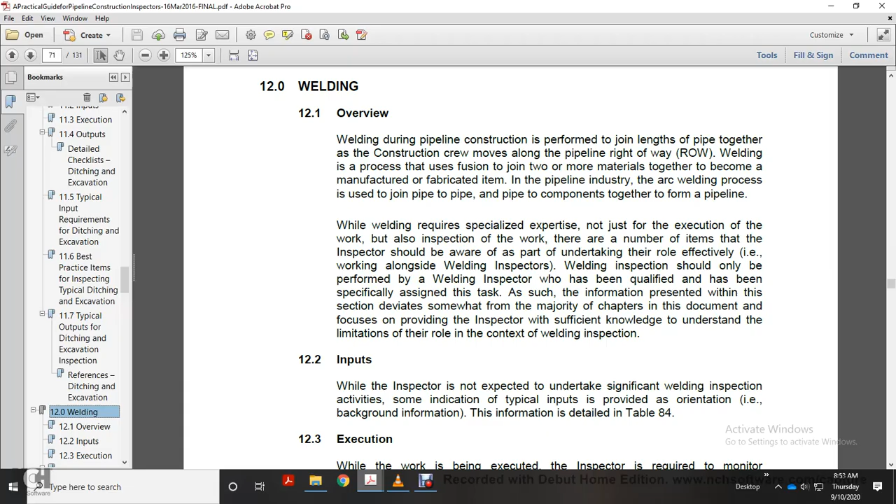Alright, Chapter 12, Welding. Chapter 12, Welding. Practical Guide for Pipeline Construction Inspectors, CEPA Foundation, INGAA Foundation, Incorporated, published March 2016.

Alright, Welding Overview. Hold on, let me just get situated here. Alright, overview. Welding during pipeline construction is performed to join lengths of pipe together as the construction crew moves along with the pipeline. Welding is a process using fusion to join two or more materials together to become a manufactured or fabricated item. In the pipeline industry, the arc welding process is used to join pipe to pipe, and pipe to components to form a pipeline. Welding requires specialized expertise not just for the execution of the work but also inspection of the work.

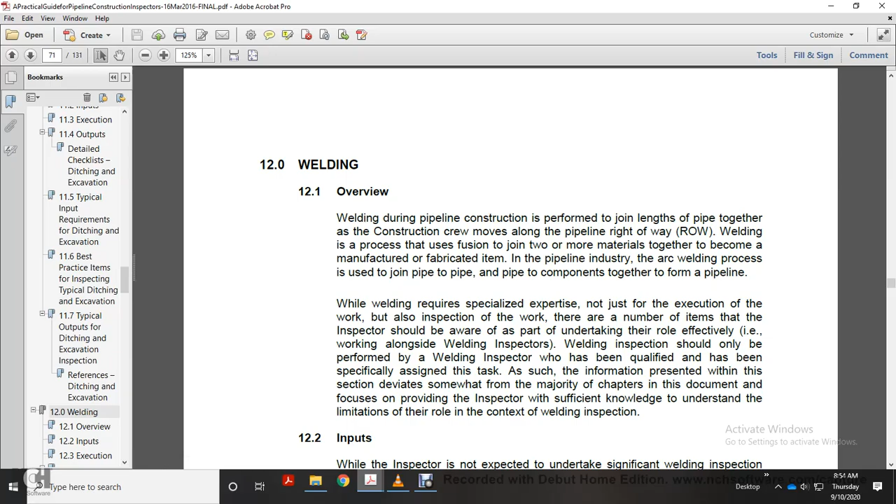There are a number of items that inspectors should be aware of as part of undertaking the role effectively. Working alongside welding inspectors: welding inspections should only be performed by the welding inspector who has been qualified and has been specifically assigned the task. As such, information presented within this section deviates somewhat from the majority of the chapters in this document, focusing on providing the inspector with sufficient knowledge to understand the limitations of their role in the context of welding inspection.

12.2 Inputs. While the inspector is not expected to undertake significant welding inspection activities, some indication of the typical inputs are provided as orientation and background information. The information is detailed in Table 84. 12.3 Execution. While the work is being executed, the inspector is required to monitor the workmanship and report on the progress on a periodic basis.

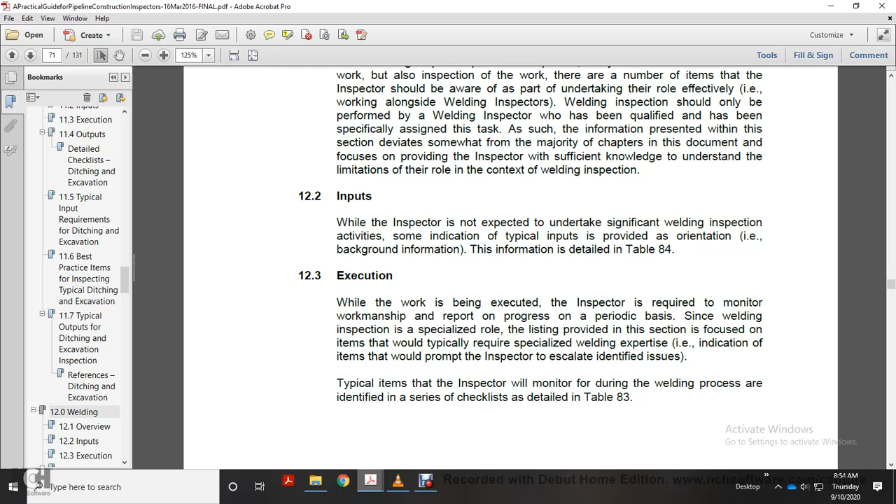Since welding inspection is a specialized role, the listing provided in this section is focused on the items that would typically require more specialized welding expertise. items that would prompt the inspector to escalate identified issues. Typical items the inspector will monitor during the welding process are identified in the series of checklists, Table 83. Alright, Table 83, Monitoring Requirements of Welding. Prior to commencing on a daily basis, ensure that the key issues have been identified, detailed and addressed.

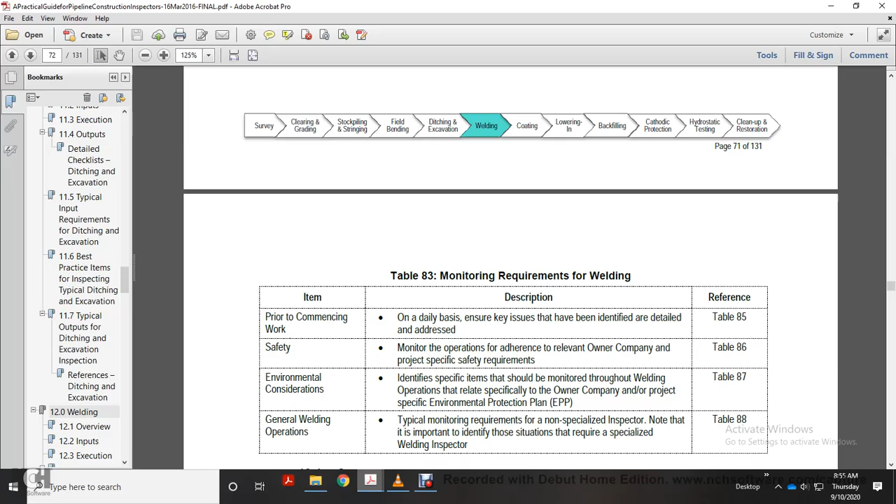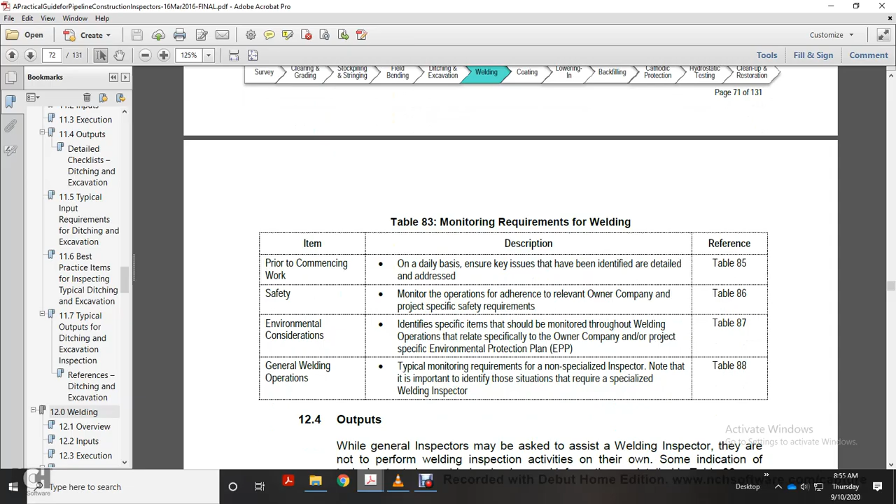Safety. Monitor the operation's adherence to relevant owner company and project-specific safety requirements. Environmental considerations. Identify specific items that should be monitored with a welding operation that relate to the owner company or the project-specific environmental protection plan. General welding operation. Typical monitoring requirements of a non-specialized inspector. Note the importance of identifying situations that require specialized welding inspection.

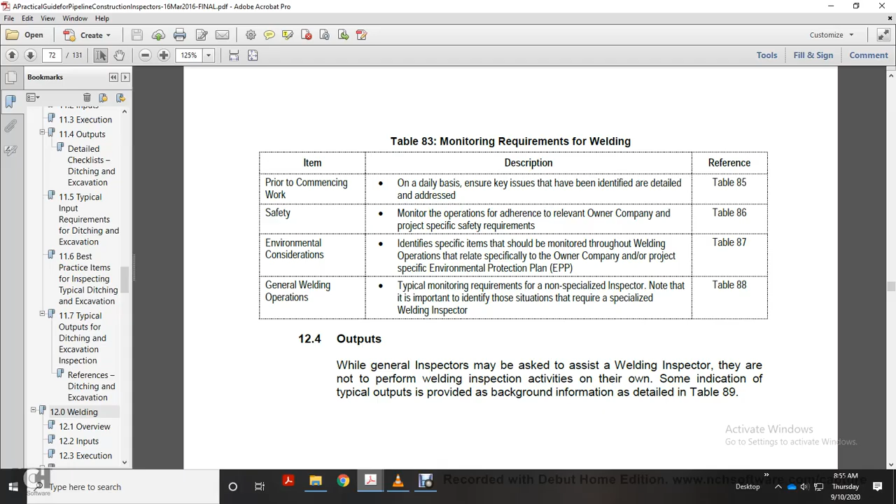12.4. While the general inspector may be expected to assist the welding inspector, they are not performing welding inspection activities on their own. Some indication of the typical outputs are provided as background information detailed in Table 89. 12.5. Typical input requirements of welding inspection. Table 84. Information requirements of the welding inspection.

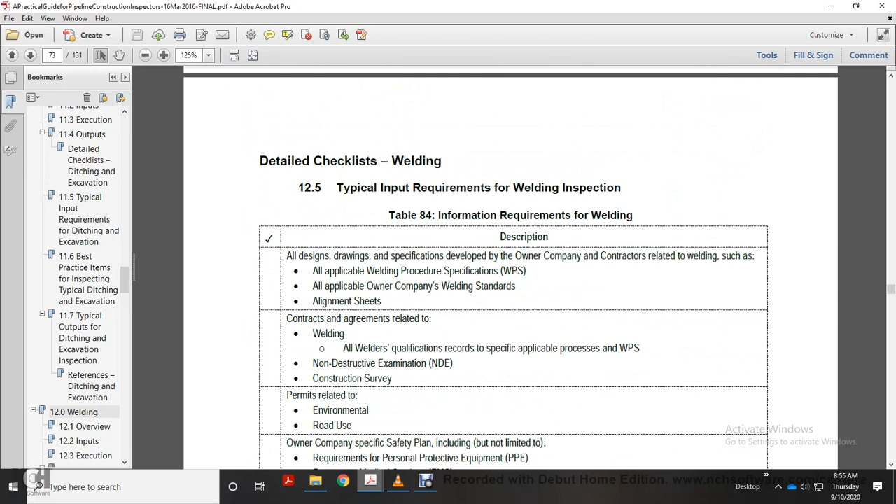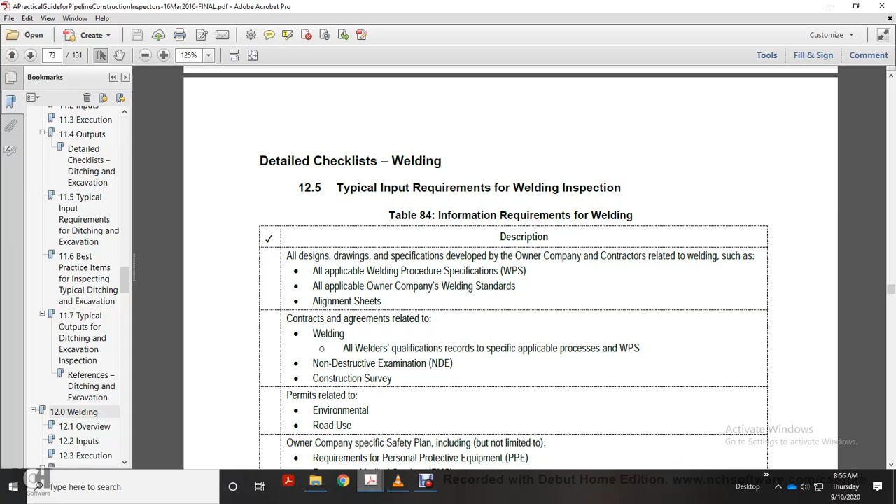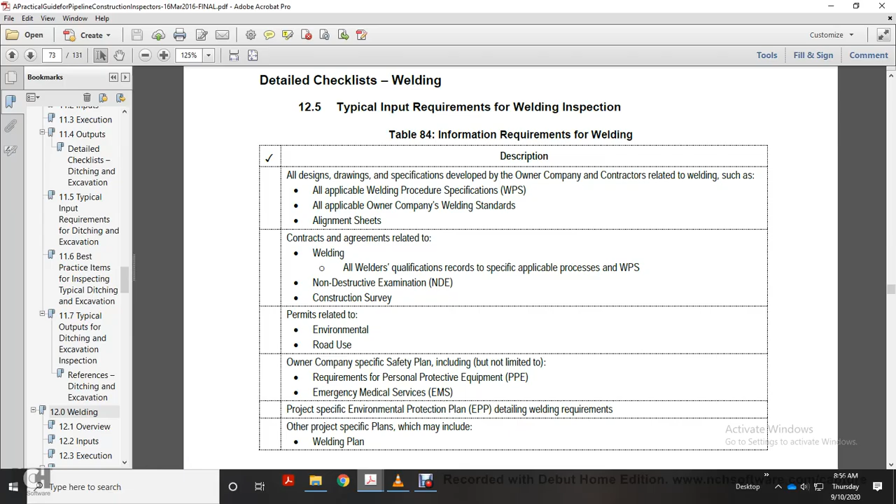All drawings and detailed specifications from the owner company and the contractor related to the welding, such as all applicable welding procedure specifications, or WPSs. All applicable owner company welding standards, alignment sheets, contract agreements related to the welding, all welder qualification records for the specific applicable process, welding procedure specifications, non-destructive examination, construction survey, permits related to environmental and road use, owner company safety plan, including but not limited to the requirements for personal protective equipment, emergency medical services, project-specific environmental protection plan, detailed welding requirements, and other project-specific plans which may include a welding plan.

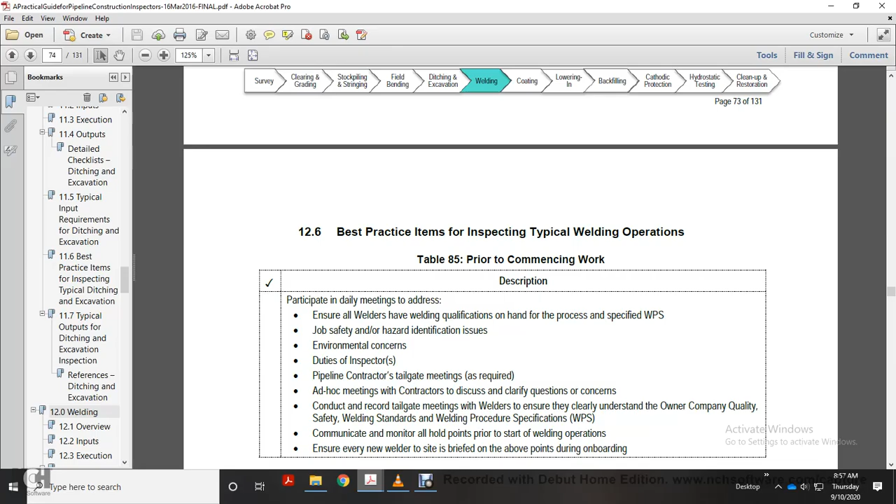Alright, Table 85. Prior to commencing work, participate in daily meetings to address and ensure all welders' welding qualifications are on hand and processes are welded per the welding procedure spec. Job safety and hazard identification issues, environmental concerns, duties of an inspector, pipeline contractor tailgate meetings as required, ad hoc meetings with the contractors to discuss and clarify questions and concerns. Conduct and record tailgate meetings with the welders to ensure that they clearly understand owner company quality, safety, welding standards, welding procedure specifications, communication, and monitoring of all points prior to starting the welding operation. Ensure every new welder to the site is briefed on the above points during onboarding.

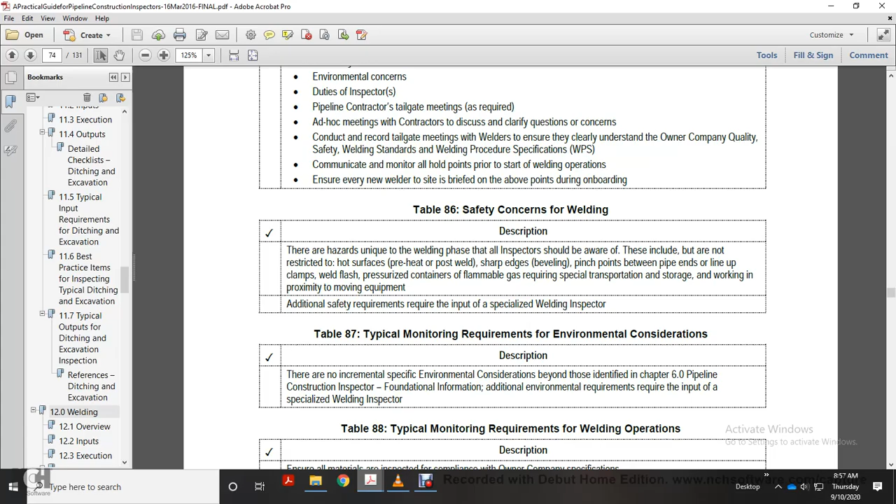Table 86, Safety concerns of welding. There are hazards unique to the welding phase that all inspectors should be aware of. They include, but are not limited to, hot surfaces from preheating and post-welding, sharp edges from beveling, pinch points between pipe ends and line-up clamps, welding flash, pressurized containers and flammable gas requiring special transportation and storage, and working in proximity to moving equipment. Additional safety requirements require the input of a specialized welding inspector.

Table 87, the typical monitoring requirements of environmental considerations: no incremental specific environmental considerations beyond what is identified in Chapter 6.0, Pipeline Construction Inspector Foundational Information. Additional environmental requirements require the input of the specialized welding inspector. Table 88, typical monitoring requirements of welding operations.

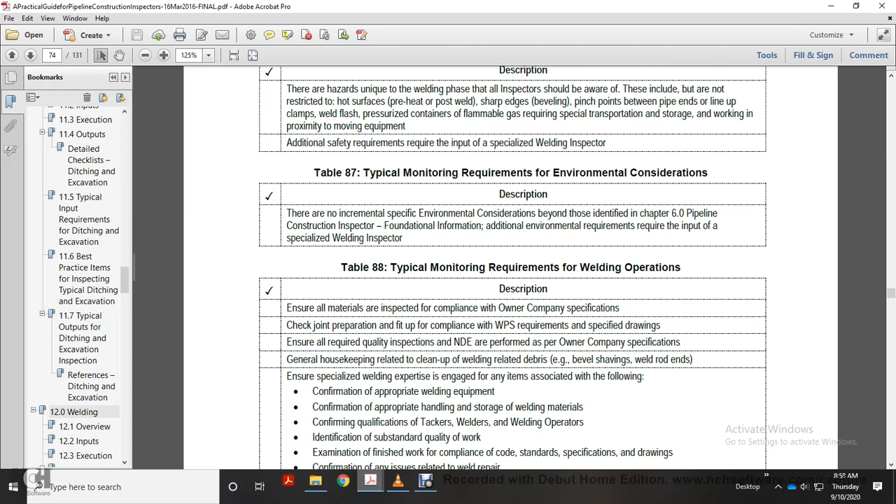Ensure all materials are inspected and compliant with the owner company specification. Check joint preparation and fit-up for compliance with welding procedure specification requirements and specified drawings. Ensure all required quality inspection and non-destructive examination are performed per owner company specification. General housekeeping related to cleanup of welding-related debris, bevel shavings, and welding rod ends.

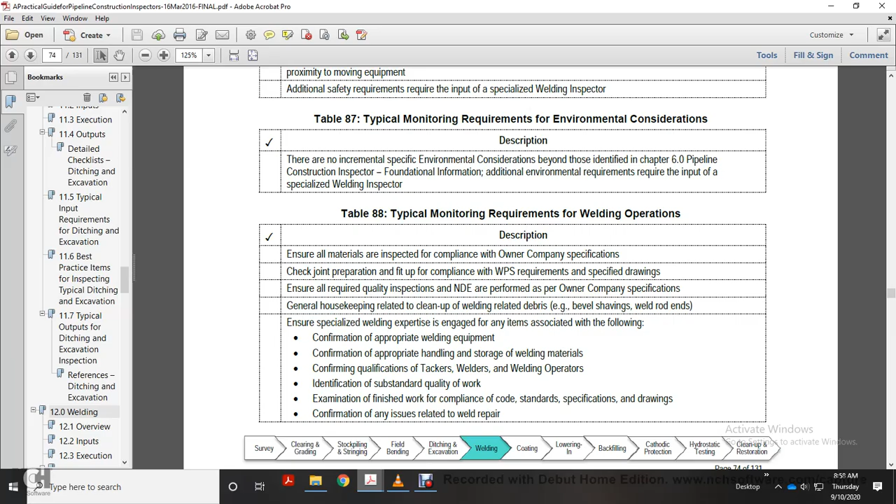Ensure a specialized welding expert is engaged in any items associated with the following: confirming appropriate welding equipment, confirming the appropriate handling and storage of welding materials, confirming qualification of tackers, welders, and welding operators, identification of substandard quality of work, examination of the finish for compliance with codes, standards, specifications or drawings, and confirmation of any issue related to weld repair.

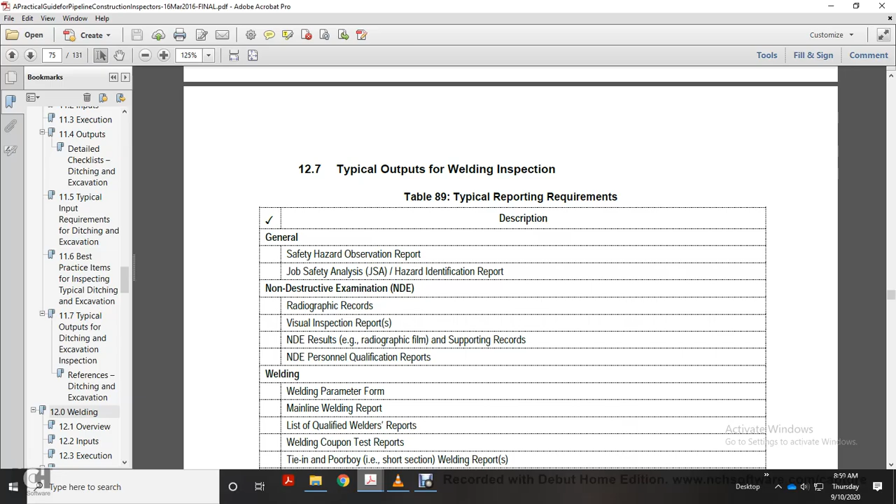Table 89, typical reporting requirements. General safety hazard observation report, job safety analysis, hazard identification report, non-destructive examination radiographic reports, visual inspection report, non-destructive examination results and supporting records, non-destructive examination personnel qualification reports, welding parameter form, main line welding report, list of qualified welder reports.

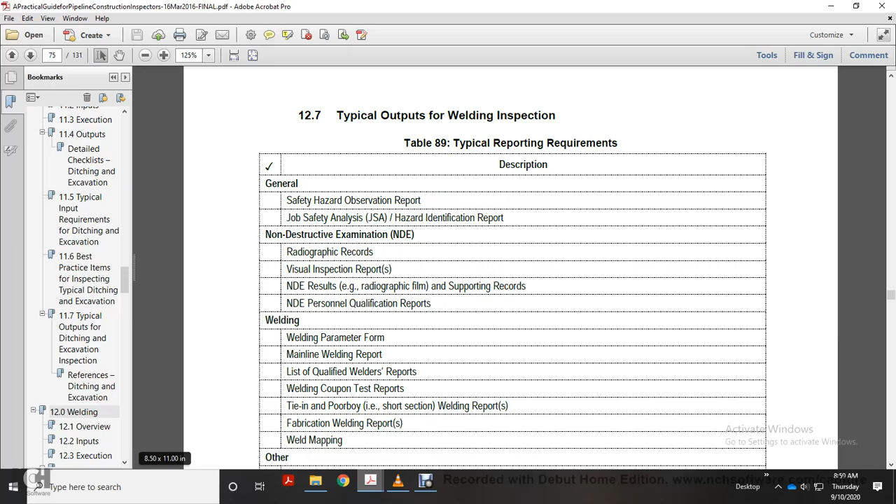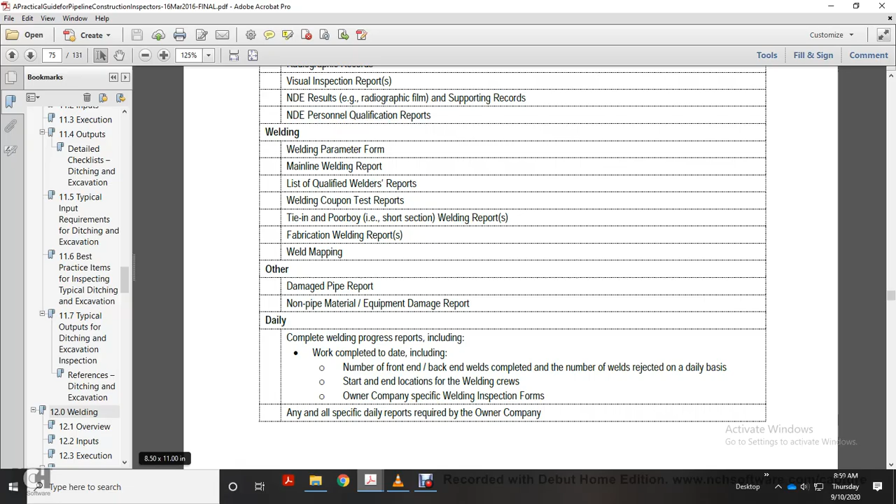Welding coupon test reports, tie-in and poor boy welding reports, fabrication welding reports, welding map, damaged pipe report, non-pipe material and equipment damage report, complete welding progress reports, including work completed to date, including number of front end and back end welds completed, and number of welds rejected on a daily basis, start and end locations, welding crew, owner company specification welding inspection form, and any and all specific daily reports required by the owner company.

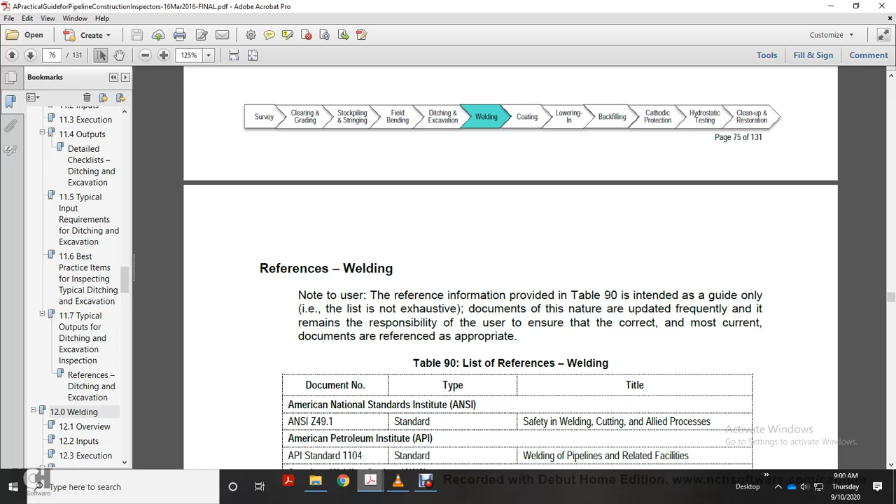Alright, references. Note to the user: reference information provided in Table 90 is intended for use as a guide only; the list of documents is non-exhaustive in nature and updated frequently, and it remains the responsibility of the user to ensure that the correct and most current documents are referenced as appropriate. American National Standards Institute, Safety in Welding, Cutting and Allied Processes. American Petroleum Institute Standard 1104, Welding of Pipelines and Related Facilities. American Welding Society QC1 standard, AWS Certification of Welding Inspectors.

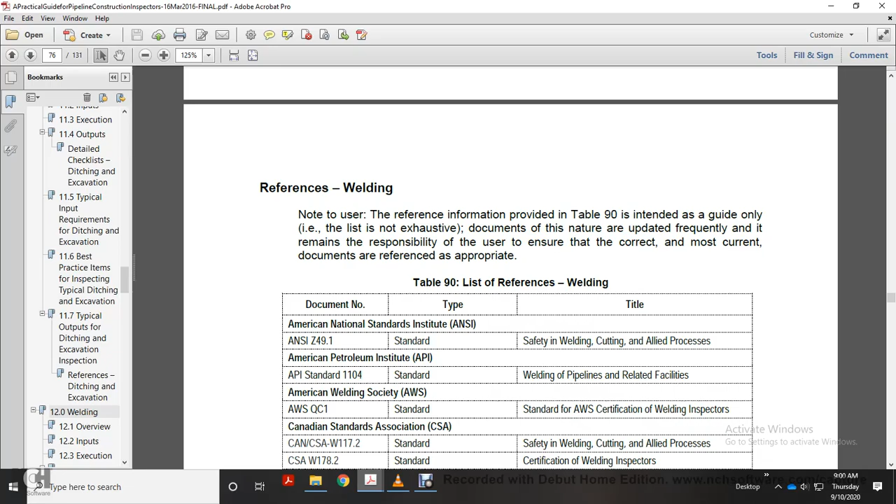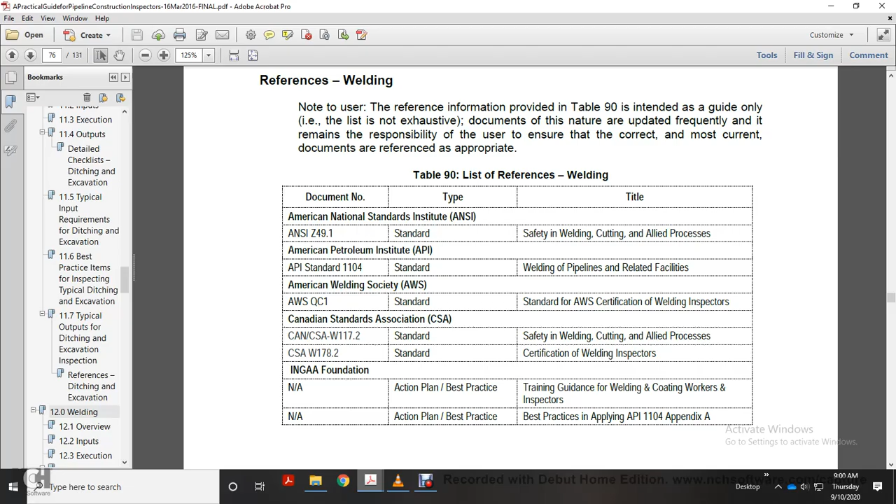Canadian Standards Association, Safety in Welding, Cutting and Allied Processes; Certification of Welding Inspectors. INGAA Foundation Training Guidance for Welding and Coating Workers and Inspectors. Best Practices in Applying API 1104 Appendix A. Alright, Chapter 13, Coating.